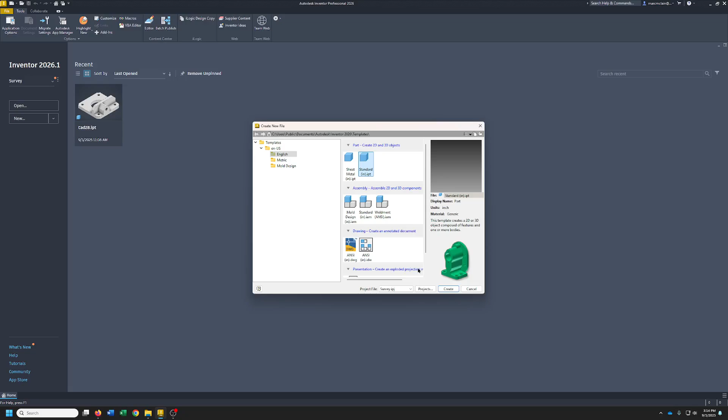From up here, it's going to be English Standard. Create. All right, first thing you want to do is we're going to start on the top view. So we'll start sketch, pick this, and then don't forget, roll this back over. We'll just do the middle circle.

All right, so let's see, we're doing diameter, and it's a diameter of 2.5. And then inside, we'll go ahead and do that one. That'll be a diameter of 1.75.

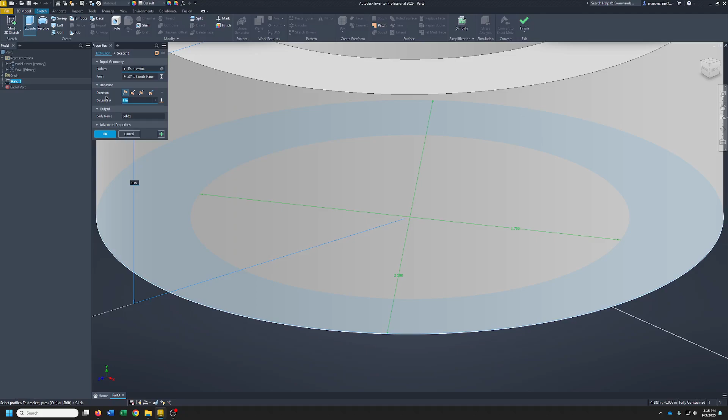Then we'll just go ahead and extrude those, and we're going to extrude it a total of 1.5. All right, so that's got our middle. We'll go ahead and hit that to get it out.

Now, we're going to expand this and see there's your planes. That's the plane we want. So I'm going to right click on that, say new sketch. It's going to go up this way.

I'm going to draw me a line out there, draw me a line this way. We want that to be 30. One up there, and this is going to be 3.5 long. 3.5, and then hit tab, and that'll be 30. And there you go.

All right, now this line, we want it to be 4. All right, so that's those two. Now...

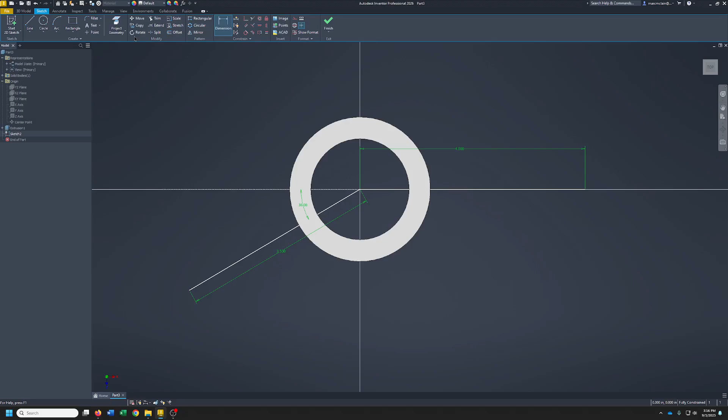I think they're going to both offset the same. Yeah, 1.75. Let's see, so we got radius or diameter of 1.75 here. So I'm just going to do it the easy way. And then this one is a radius of 0.75, so that'd be 1.5.

There we go. Yes, I know, I'm just doing some... .875 is what I'm looking for. So offset.

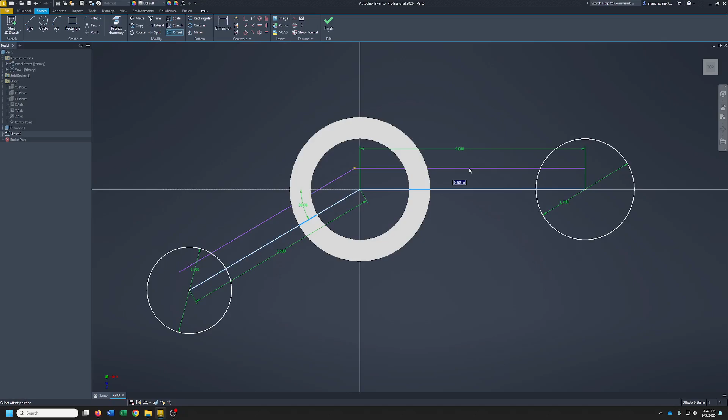Pick that, and it's going to get both lines, but that's okay. 0.875, and they're nice and parallel.

All right, so it's got those two. Erase that one and that one, and that one. There we go. We'll go ahead and trim this off. All right, now I'll offset the other side, 0.75.

Tell you what, let's back up. All right, let's erase that line. Now we should be able to do it without a problem. Yep, there we go.

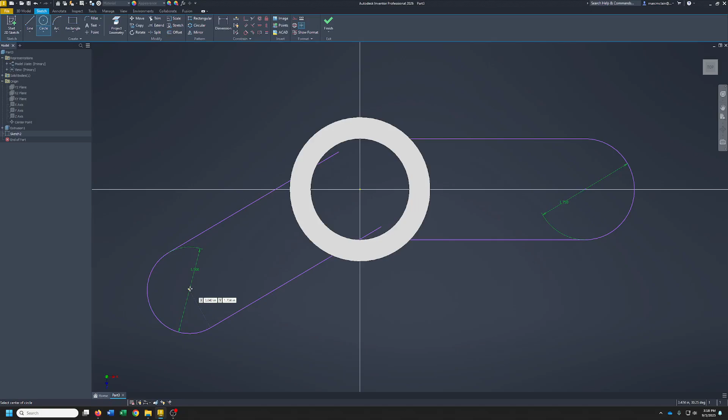Try not to grab the line. There we go, and we'll trim this. And I'm going to go ahead and put another circle here, 0.75.

And I'm going to project geometry, and we'll pick this circle. Now, trim all our purple lines off. Make sure it says at least an inch and 30 degrees, and then we'll offset that, 0.375, which is half of 0.75.

You could also do just one side and mirror it. It's up to you. Delete that and trim.

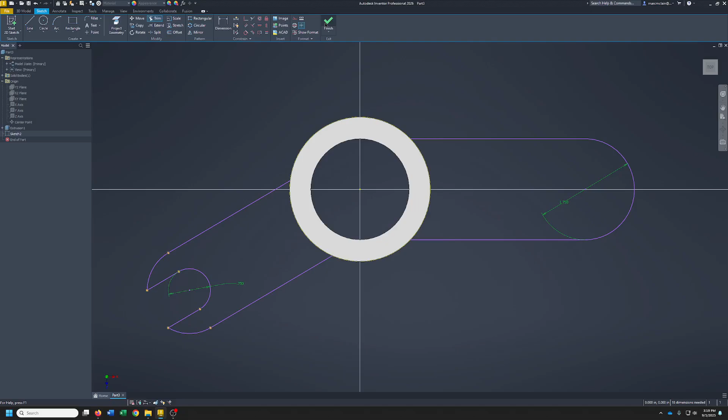And there we go. Now, we'll extrude, and these are going to go up 0.5. All right, now we can get our other things. They're both going to come out 0.75 or 0.25.

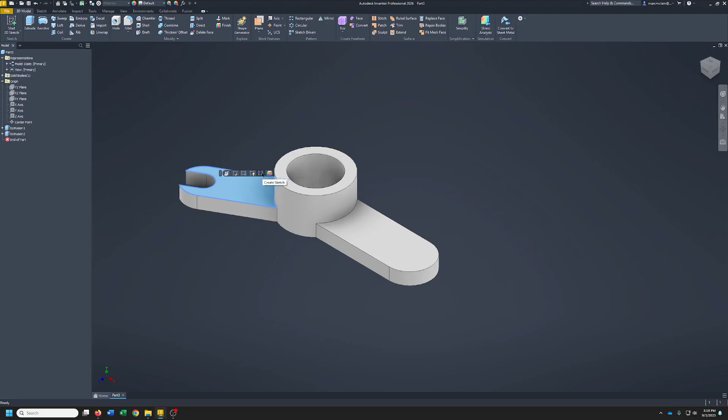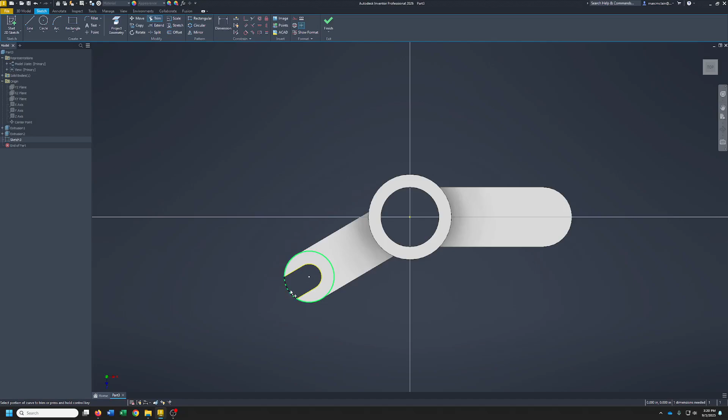So create sketch again. Delete that, and then I'll trim between it. Now we get the one up here.

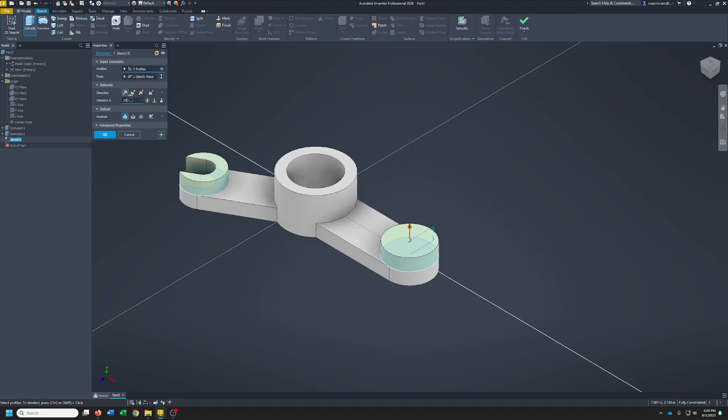Okay, now we use our hole command. And we're going to use this and that. All right, top of it, 1.25.

Depth is going to be 0.25. And 0.75. We'll pop that right there and then pick the edge and it'll center it. Make sure it's through all is checked. All right, that's got that.

Now we're going to get our ribs. All right, once again, go back here, say it. There we go. That one goes right through the middle. Hit F7 on your keyboard, and that'll do this.

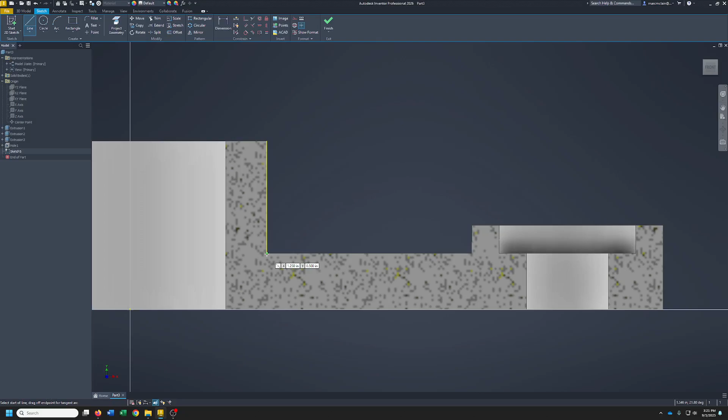Now, I'm going to zoom in on this. I'm going to project geometry here. I'm going to start a line there. I'm going to come out 0.8.

Now I'm going to erase this and that. Now, I'm going to start a line here. I'm going to come up 0.8. I went the wrong way.

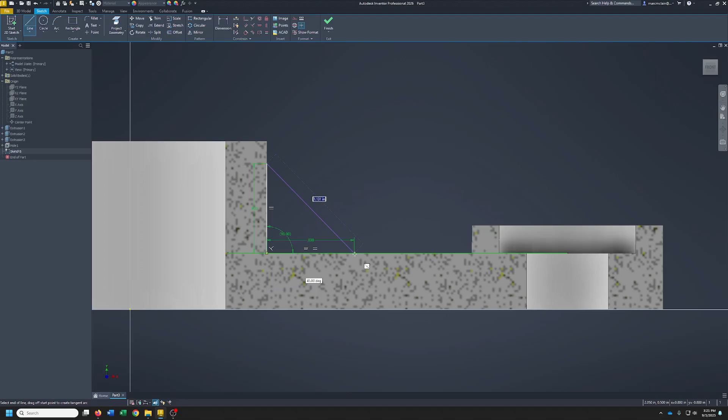.8. See? 90. There we go. And then we'll go back there. All right, delete this one, erase that one.

All right, so there's my lines. I've got two of them. You hit finish, and we're going to use the rib command. Okay, make sure you set it for your thickness. In this case, it's 0.5. Click, and there we are.

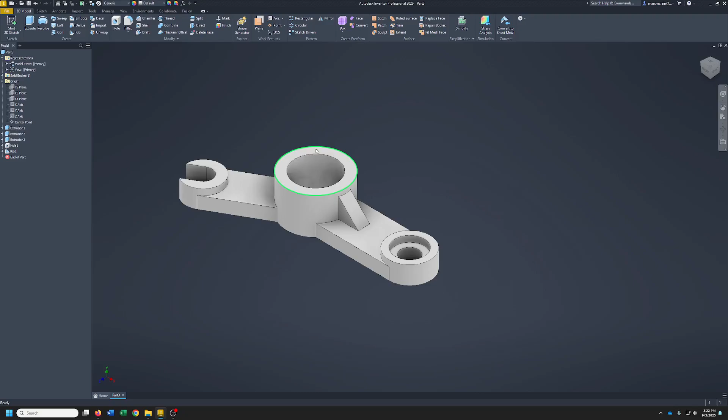See? Now I got to get one on this one. I could do it the same way, but let me show you a better way. I'm going to go ahead and do this up here. I want to draw a line.

And I want that to be 75 degrees over on the side there. So the 3.397 doesn't matter, it can be whatever length. This needs to be 75 right there. All right, now I'm going to finish that.

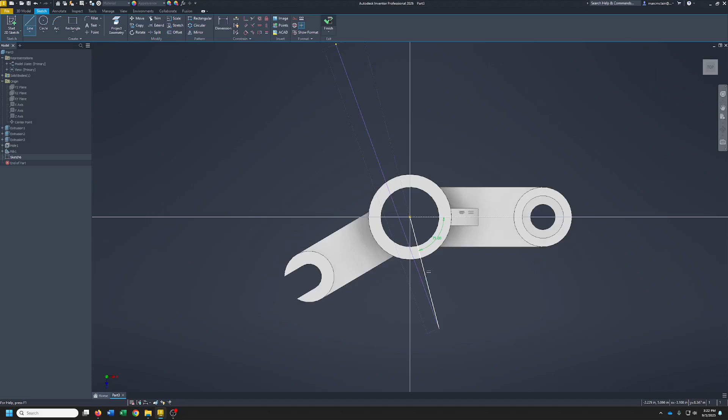You're like, well, what are we going to do with that? We're going to use that to make a plane. So you hit plane, and you want 3 points. First point, second point, and then pick anywhere on this big cylinder for the third point.

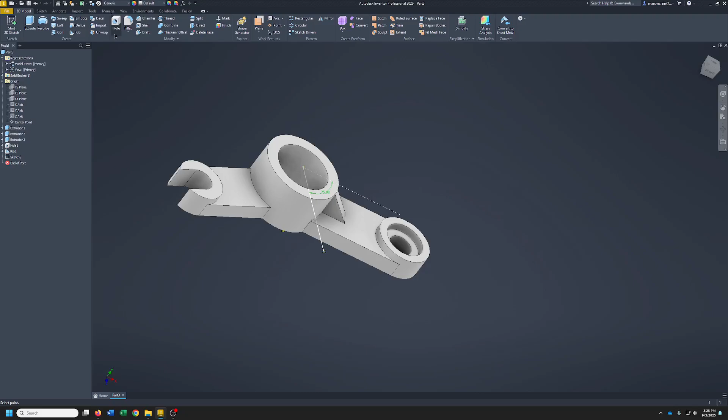Or not, let's try that again. I'll delete that. Finish. There we go. Three point.

There we go. I don't know why it didn't work the first time. Doesn't matter. All right, so there we are.

Now we're going to mirror right here. Mirror. Pick that. Come over here and pick mirror plane. Pick the plane you just made, and then hit OK.

Now come over here, kill the visibility on the plane, and on that sketch. And there's your part. All right, now we're going to lay it out.

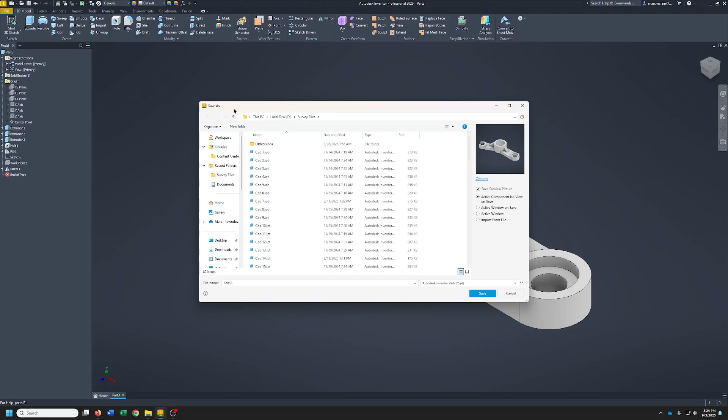But first, let's save it. So we're going to save. This will be Cad55. And we'll save it. Now, we're not going to PDF this out because we want the actual drawing. So you're going to pick here, new, and either one of these.

All right, don't forget, we're going to change this. So we're going to right click on the sheet, go to edit sheet, change our B, probably big enough. If it's not, we'll go back.

Now I want to move this up to the top, so let me go ahead and edit sheet again and just see, click that right there.

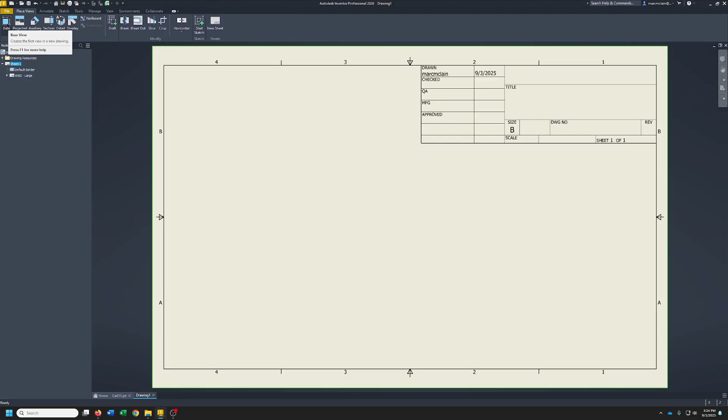All right, so our base view in this case is going to be our top view. So go base, all right, flip that up to top. And we'll put it right here.

And it's half scale, okay, which is fine. I mean, you can try to go bigger. 1:1 is going to be too big. Type in 0.75. I kind of like that. We'll go with that one.

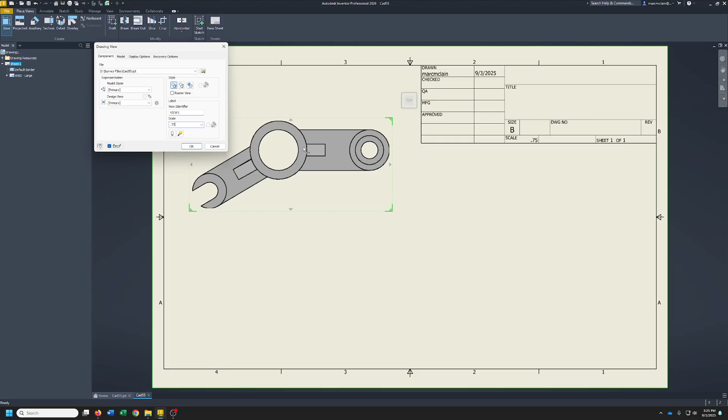Hit OK. Now, we're going to project. Oh, our angle is off a little bit. Well, when that happens, nice little teaching thing, we'll go ahead and just open that back up. All right, there's our problem.

So I'm going to delete the mirror. All right, let's go back to our work plane and see what's up with that. See, it said skewed at an angle. So I didn't get it quite right. So we'll delete that too.

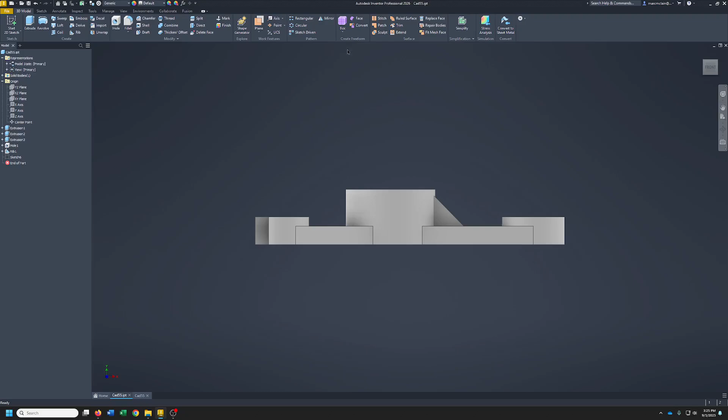All right, let's try that again. Get our sketch back out here. Make it visible again. All right, plane through three points.

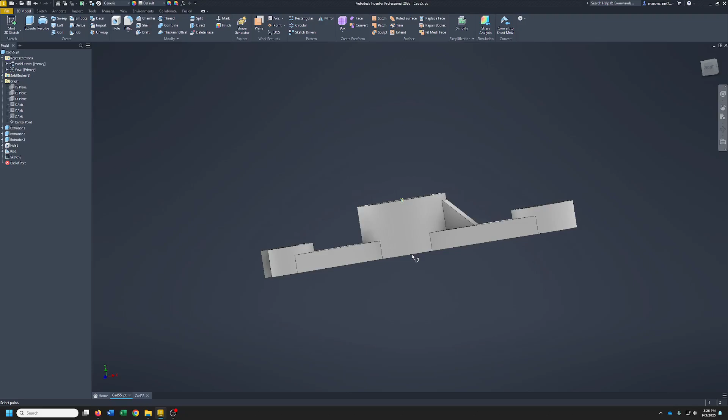Let me do an axis through here. There we go. Now we can get our three points.

Maybe we can get to. Let's see. Nope, it's still skewed.

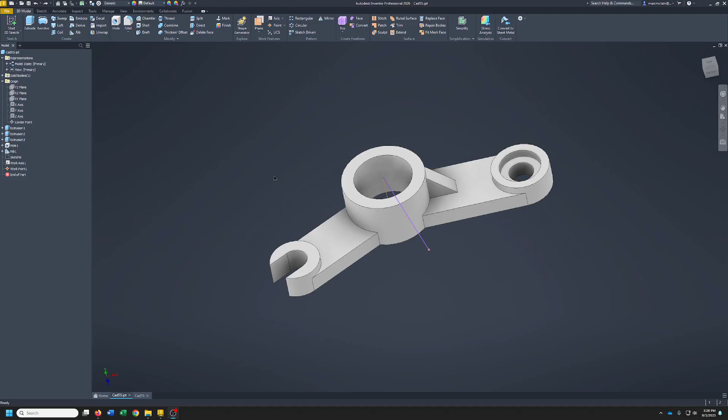All right, let's try this again. This time we'll use a different type since that's not going to line up for us. Plane, and we'll just pick the line, and then we'll pick this face, and then we'll just hit green check. And there we go.

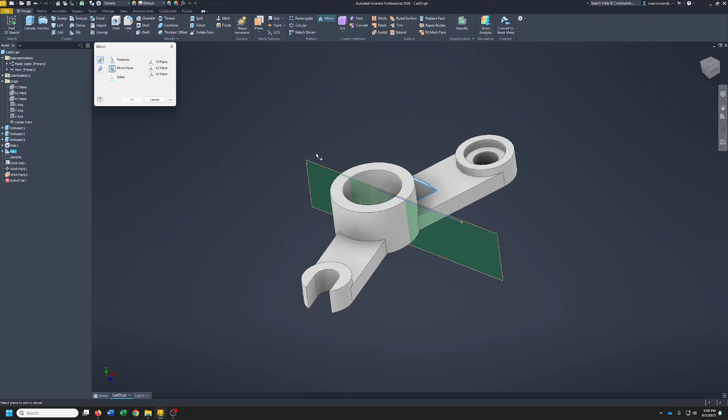All right, now we should be able to mirror. Pick that, mirror plane, pick that. Hit OK. Let's inspect it before we leave this time. Yep, we're good.

All right, so color visibility. And you can also hit Alt V on that if you want to. I'm going to get rid of this work points and this work axis. We don't need them. All right, so there we go. Now go ahead and save that again, and you go back.

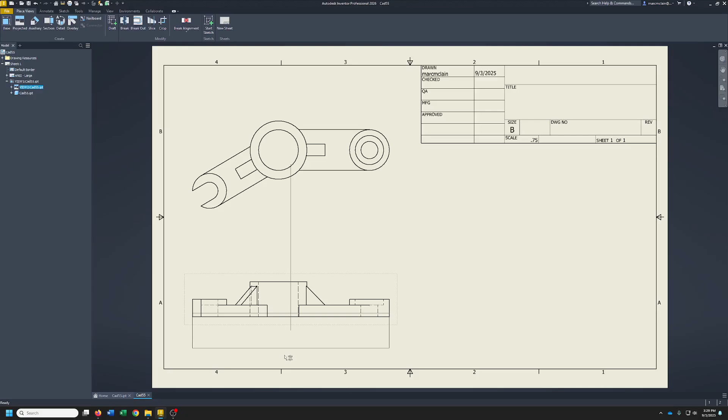And it updates. All right, so we need an auxiliary of that. I'm going to pull this in a little bit more. Auxiliary.

And we'll just put it right there. And that gives us this view in true. All right, so we'll go ahead and throw our annotations.

There we go. Aligned. We'll uncheck this box so that box doesn't come up every time.

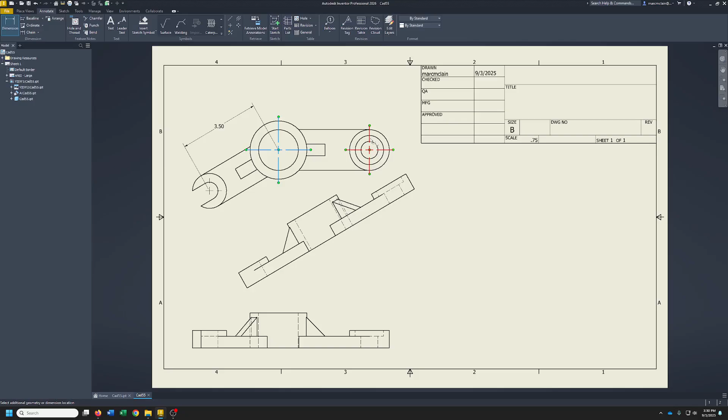And then hole and thread for this one. That gives the spot face and everything like that.

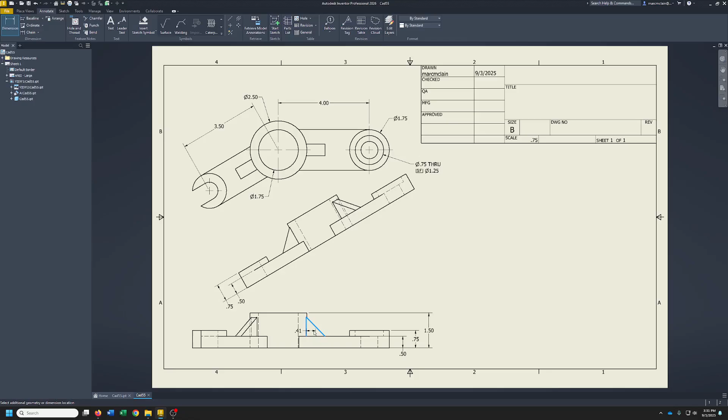You gotta watch those dots. If you get those, it won't let you do the angle. There we go. And that's basically it. Not a whole lot of dimensions are necessary on this one.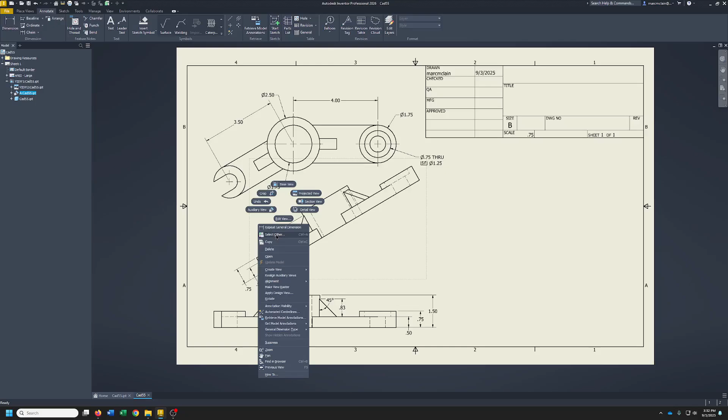As you can see, that one went up a little too high, so I can go back to this, and we want to edit that one, right? So go back to our rib, go back to our sketch, edit our sketch.

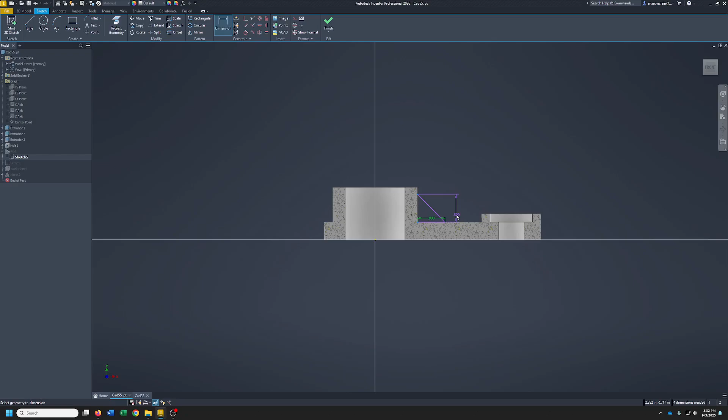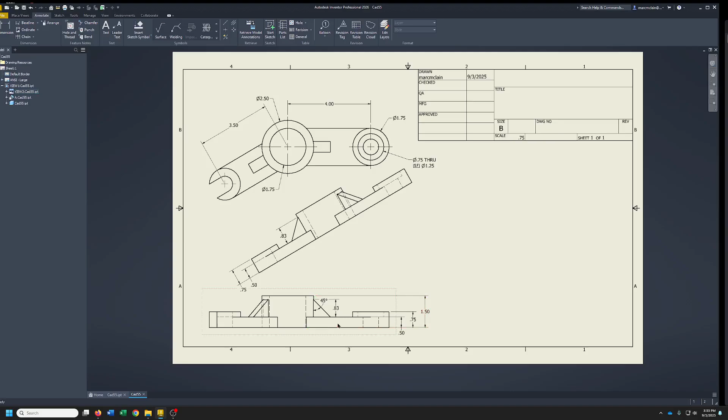So we'll just leave that alone. If yours comes out, there it is. There we go. I just had them in the wrong spot. Okay, that's got it.

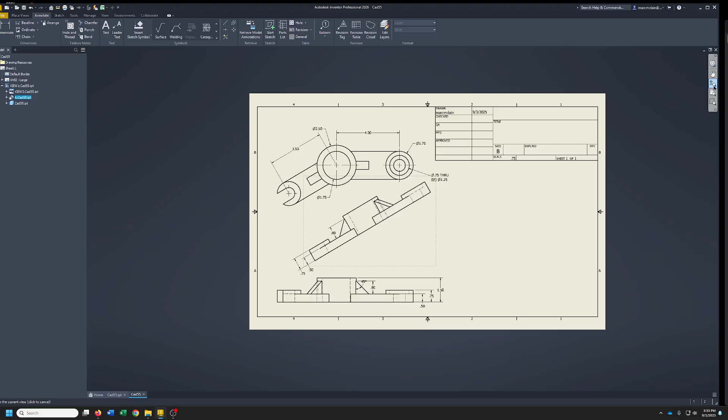There we go. All right, so we're ready to output it. File, export, PDF. And Cad55 PDF will be fine. Put that out. That's what you turn into me. All right, we got it.